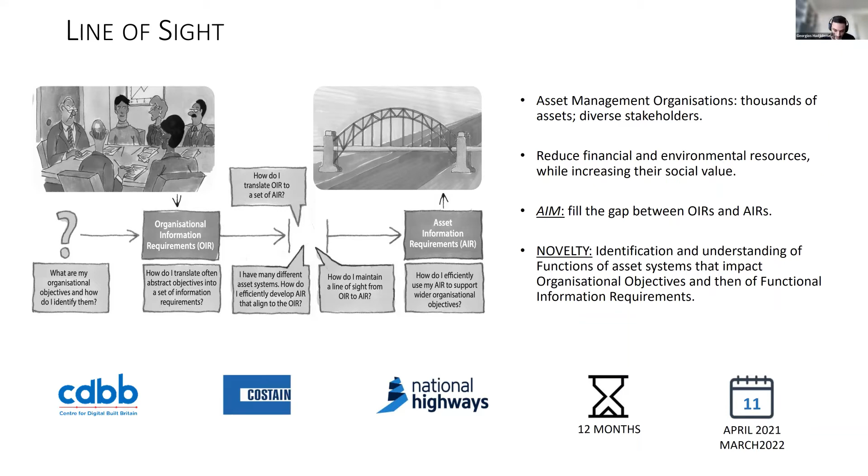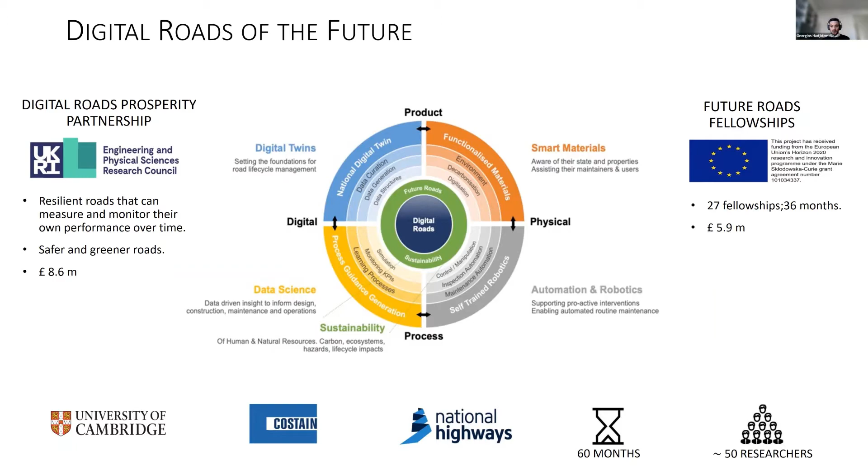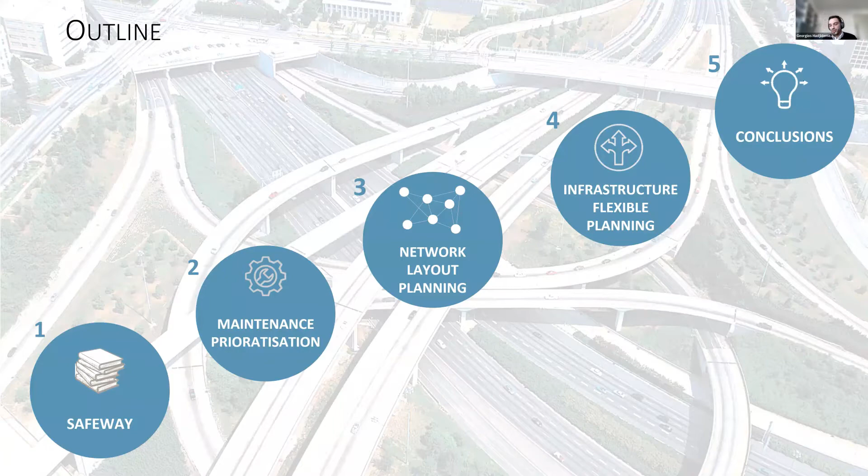This is the outline of today's presentation. I will start by presenting the background of SafeWay, and then 3 methodologies that we developed in CSIC for the SafeWay project. At the end, I will present the highlights and work in progress.

Only in the European Union, goods transport equals more than 3,000 billion ton-kilometers yearly and around 6,000 billion passenger kilometers. The majority of this is on roads and railways. However, European infrastructure networks are currently in insufficient condition due to low investments, and that's why they have high risk of accidents and in some cases low performance and low availability.

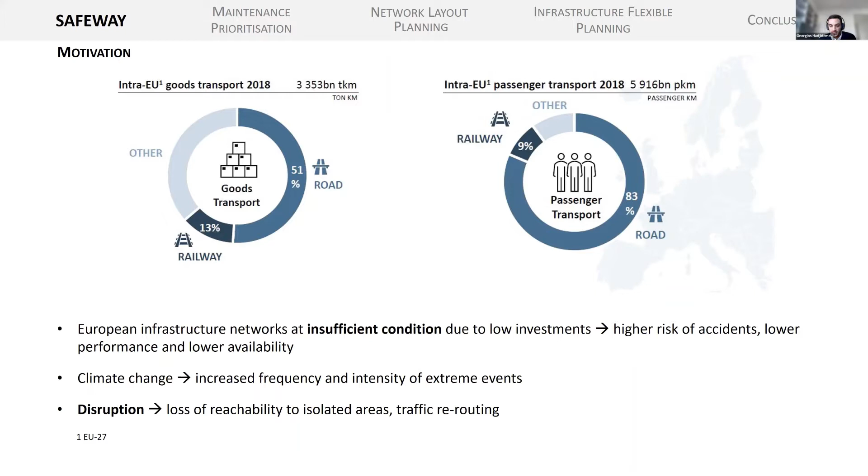In addition to that, climate change will increase the frequency and intensity of extreme events and thus the possibility of a disruption. Disruption on a transport network may cause loss of reachability to areas of interest, traffic rerouting, and reduced productivity.

So the aim of SafeWay was to design and implement strategies and tools to increase resilience of inland transport infrastructure by reducing vulnerability to extreme events. By inland transport infrastructure, of course, we mean roads and railways.

The project was a 42-month project, started in 2018, finishing this month. The budget was 4.5 million. We were 14 partners from 8 countries around Europe. The partners included universities, technology companies, and asset owners.

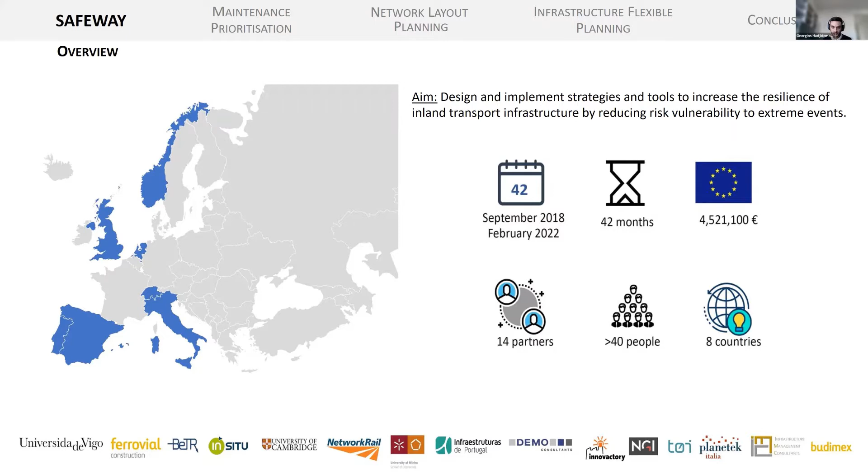Extreme events can be divided into natural disasters, including heat and cold waves, floods, landslides, droughts, wildfires, and windstorms, or man-made events consisting of terrorism, vandalism, and accidents.

The project used 4 criteria for evaluating resilience of infrastructure: robustness, resourcefulness, rapid recovery, and redundancy. It also focused on 3 dimensions of the disaster management cycle, which are preparation, response and recovery, and mitigation. Preparation is all about prediction, monitoring, and developing decision tools.

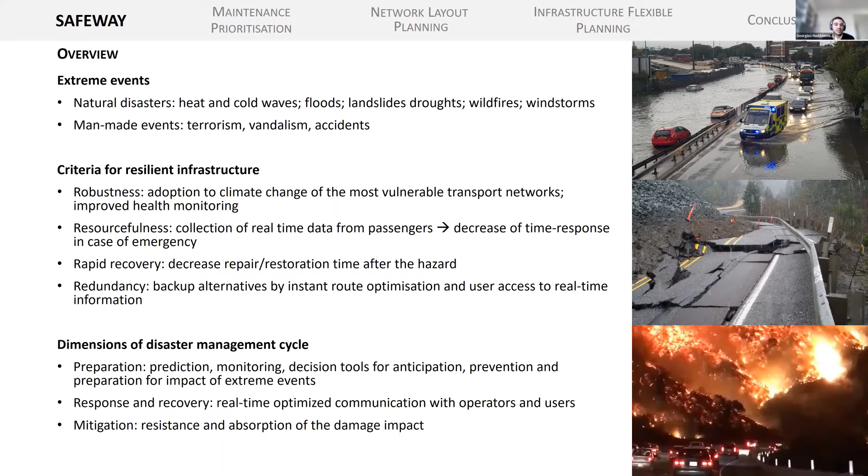In CSIC, our focus was prediction and decision tools. This was our contribution to SafeWay. But SafeWay was also focused on response and recovery by real-time optimized communication with operators and users, and also mitigating the impact of failure by using resistance and absorption of the damage impact.

These are the different work packages of SafeWay. As you can see, they include risk analysis, infrastructure monitoring, crowdsourcing, predictive models, and decision support systems. All of these are the input to the IT platform. And then we have an action plan for improving resilience. The applications that I will show today are related to predictive modeling and to decision support systems.

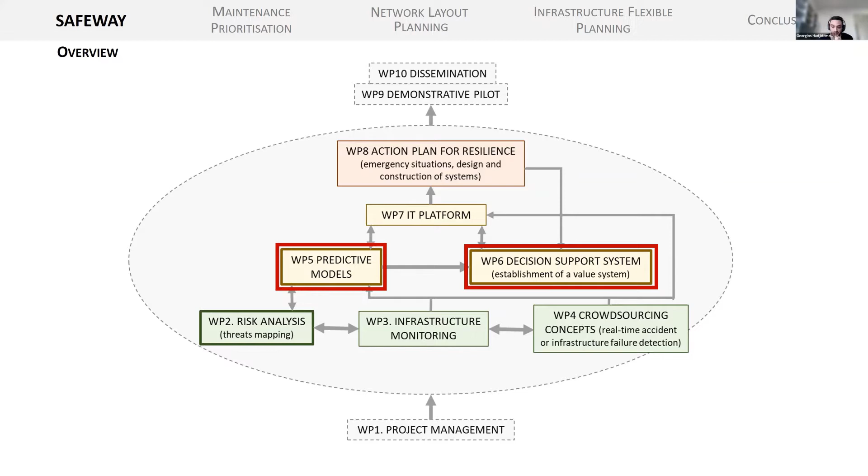The first methodology we developed was maintenance prioritization for bridge elements, considering not only the condition of bridge elements but also their criticality within the network.

The state of practice in transport infrastructure asset management can be divided into different stages, and every transportation authority has their own guidelines and their own steps that they follow.

But these are some steps that most transportation authorities follow for managing their assets. They normally start from condition monitoring, which could be manual, semi-automated, or in some cases fully automated. Then they use deterioration modeling and cost-benefit analysis to decide the optimal maintenance activities to apply, and may evaluate service and resilience of their infrastructure to plan a new network layout.

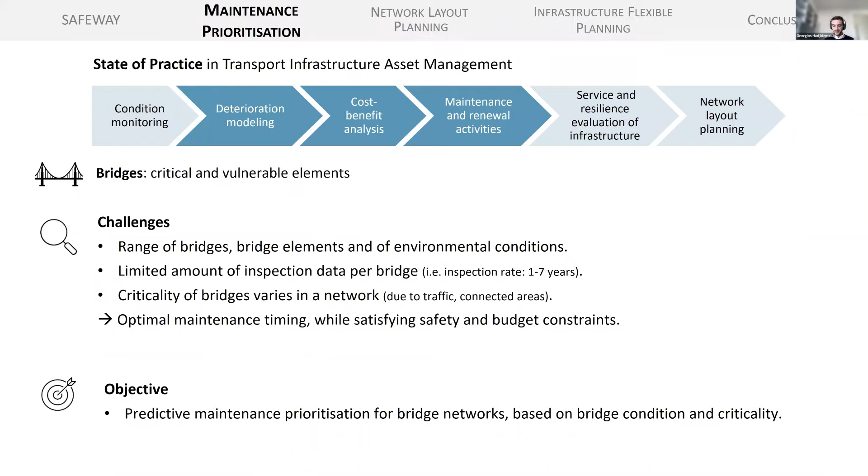Our objective was the development of a predictive maintenance prioritization method for bridge networks based not only on their condition, but also on their criticality. Our method can be divided into 6 main stages.

The first one is the deterioration model. It starts with clustering of data based on the most relevant features, and we do this to address the challenge of having few inspection data for individual bridges.

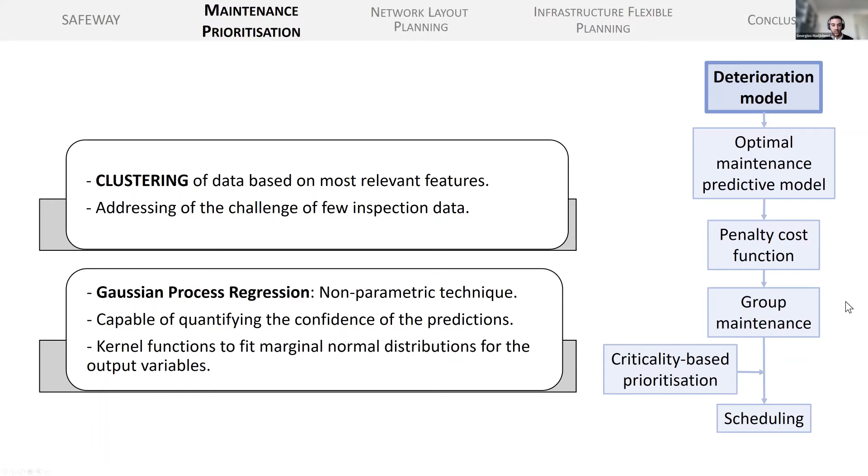Then we apply Gaussian process regression, which is a non-parametric technique. It is capable of quantifying the confidence of our predictions, since it uses kernel functions to fit marginal normal distributions for the output variables.

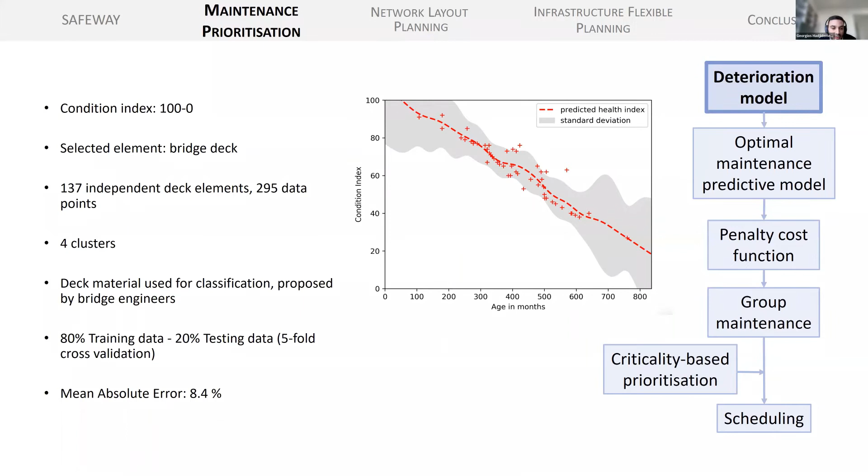We used 80% of the data for training and 20% for testing, then applied 5-fold cross-validation so that we test the entire dataset. Our mean absolute error was around 8.4%.

Moving on to the second stage of the methodology, called the optimal maintenance predictive model. Here we use life cycle cost analysis, and the output is the long-term average cost of bridge elements.

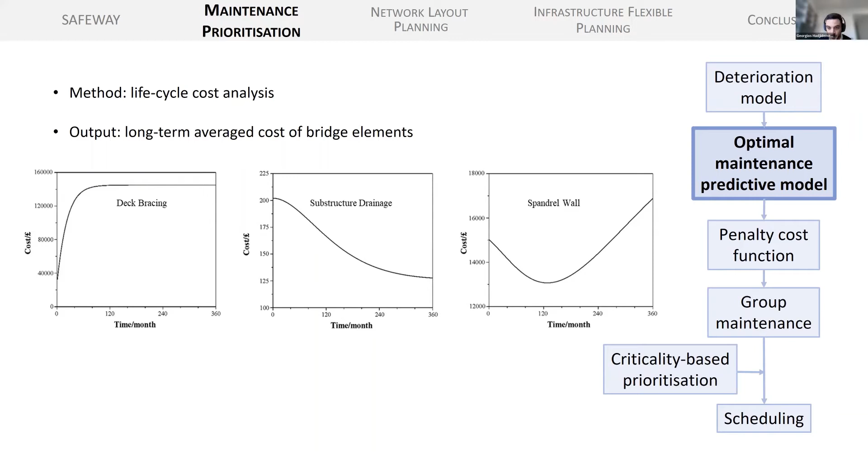The third and fourth stages of this methodology, called penalty cost function and group maintenance, aim to simultaneously maintain different elements belonging to the same bridge so that we reduce the setup cost and traffic interruption.

To do that, we use a penalty cost function, which is able to estimate the impact on safety if maintenance is shifted, in terms of money.

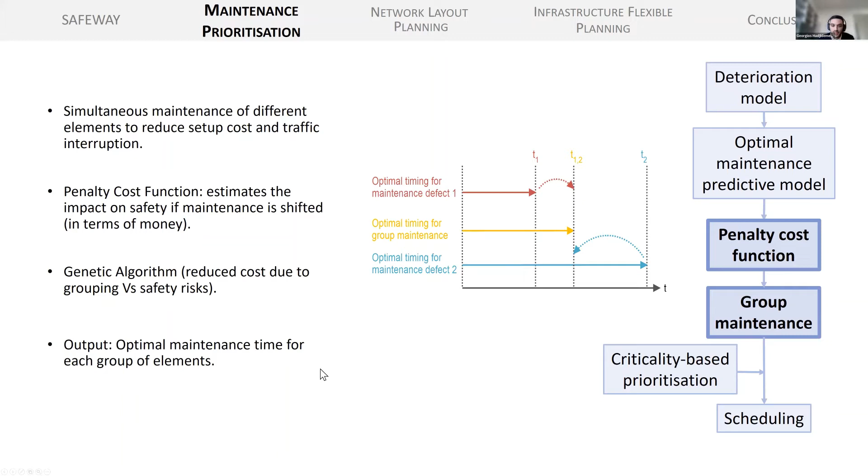Then we use a genetic algorithm to compare the reduced cost due to grouping with the safety risks. If the first is higher than the second, then we go ahead and conduct grouping. The output is the optimal maintenance time for each group of elements.

Next stage is the criticality-based prioritization of our bridges. We want to have a ranking of the bridges based on their criticality. The input here is the location of bridges and municipalities, the distance between them, and the traffic that they serve.

Here we use complex networks, and we have two different metrics to evaluate criticality. First is the traffic that bridges serve, and second is what is the extra distance cost when we remove the bridge from the network.

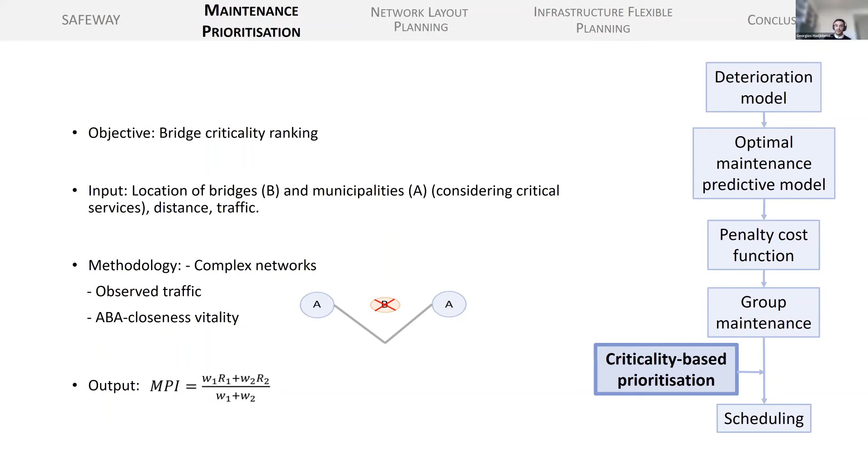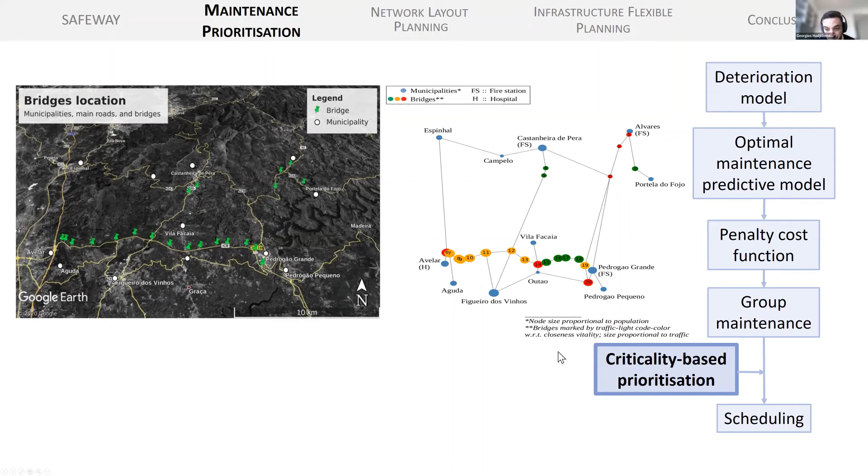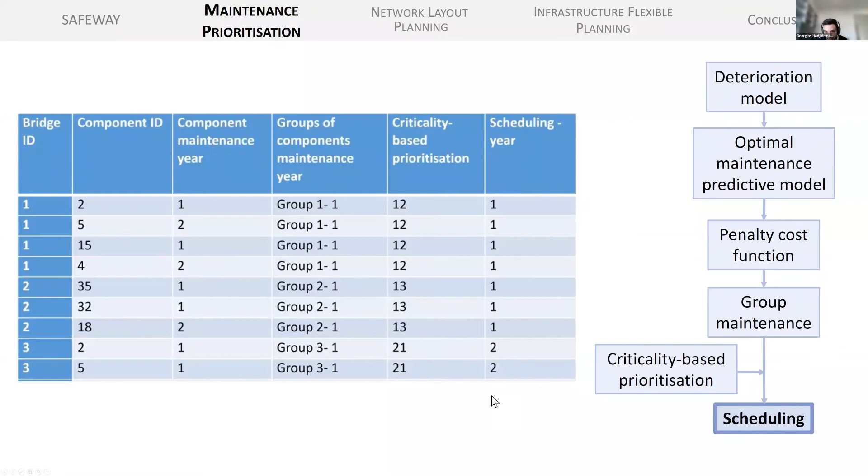Moving to the second methodology that I will present today. It's about... I cannot see the title now. Anyway, it's about the resilience evaluation of existing infrastructure and how we can plan novel infrastructure.

Resilience has different definitions in the literature. One says that resilience is the capability of a network to prepare for, absorb, recover from, and adjust to disturbances. In the literature, we can find a direct connection between resilience and connectivity of a network. When we try to evaluate the connectivity of a network and plan a new network layout, we face some challenges.

One challenge is that we need to follow a network perspective to understand failure propagation and traffic rerouting. Second is that there is significant variation in nodes and links criticality based on the traffic they serve and the impact of their failure. Last is that there is no standardized method for assessing resilience and planning network layout.

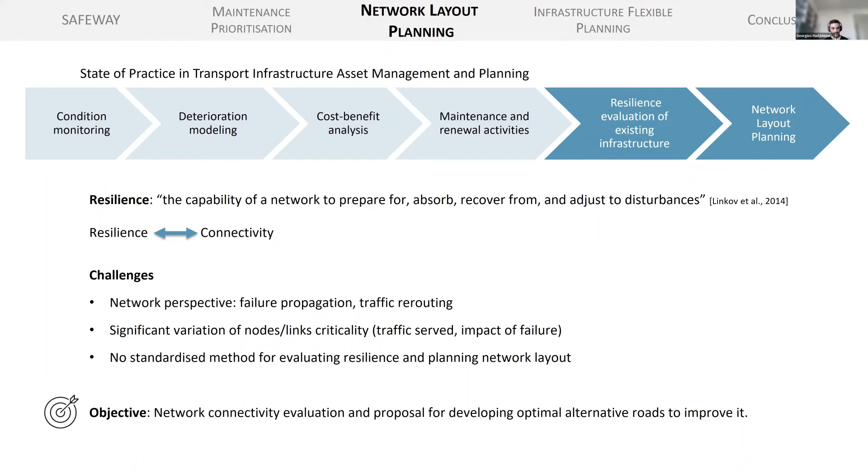Our method can be divided into 3 stages. First is spatial network extension. Here we basically design all the possible new roads that can be developed in our network. We have two types of nodes: nodes A, which represent municipalities, and nodes B, which represent bridges. The solid line links represent the existing road network, and the dotted ones represent dummy roads, which are all the potential new roads.

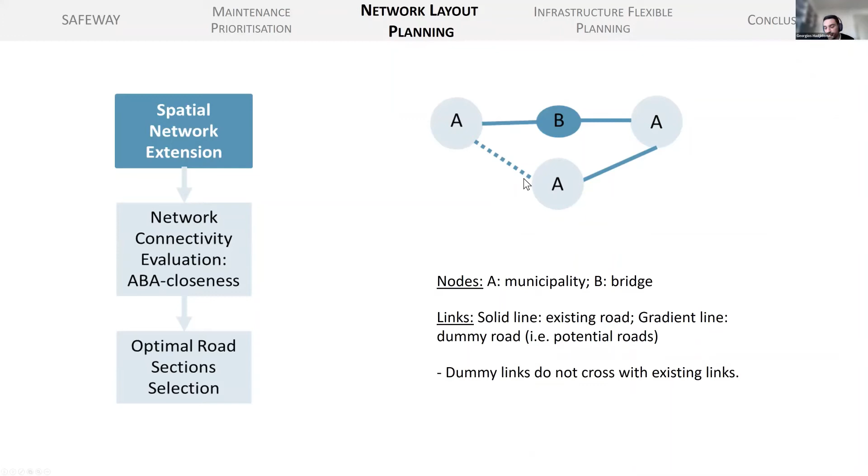Second stage is about evaluating network connectivity using our own developed metric called ABA closeness. It is based on closeness centrality, which approximates the distance between a node and the rest of the nodes of the network, and thus the level of isolation of the examined node. So when this distance is high, we have high closeness centrality and poorly connected nodes with high levels of isolation.

In our case, we use the ABA closeness, which is able to measure the distance for routes starting from a node A, so from a municipality, passing by a bridge and ending at another municipality.

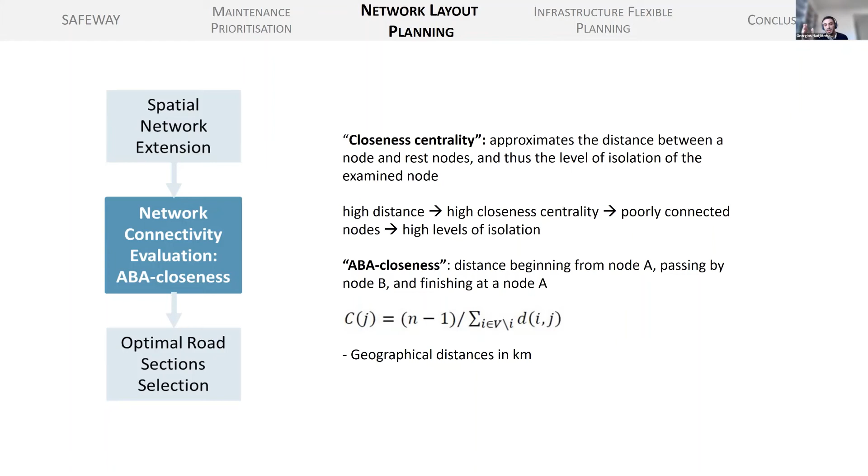The final stage is called optimal road section selection. Here we use a genetic algorithm, and the outcome is a set of K new roads to optimize ABA closeness and improve resilience. The new roads are chosen among the set of all new potential roads, and the user sets the number K of new roads based on budget and physical constraints.

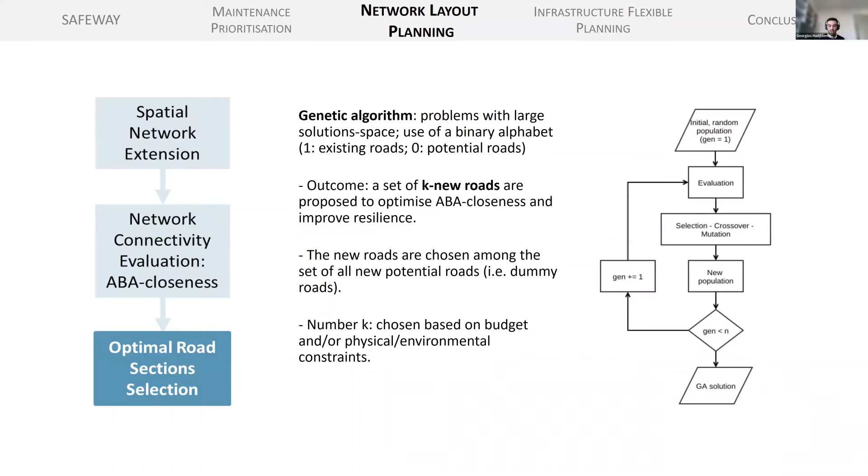This again from the case study in Portugal. We can see the developed complex network. Blue color nodes are the municipalities, yellow color nodes are the bridges. The black color links are the existing roads, and the gray color links are all the potential new roads that we can develop. For this example, we use Python.

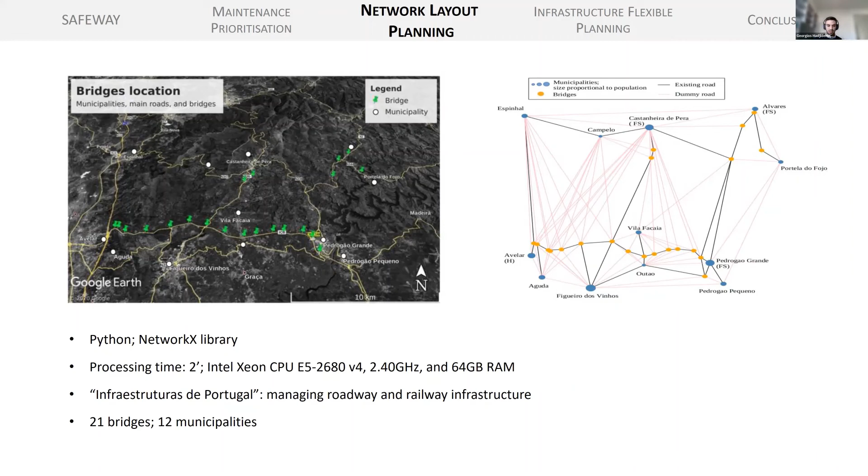Processing time was 2 minutes. Data is coming from Infraestruturas de Portugal, which is the organization managing roadway and railway infrastructure in Portugal. In this example, we had 21 bridges and 12 municipalities.

And these are the results for developing 3 new roads and 5 new roads. For 3 new roads, we can see that ABA closeness is reduced from 0.57 to 0.35. So our connectivity is improved. And in the second example, we can see that it's reduced from 0.57 to 0.31 by adding 5 new roads.

In this example, we can see that we don't have to add a very high number of new links to improve connectivity of a network. With 3 new sections, we have a significant improvement of connectivity.

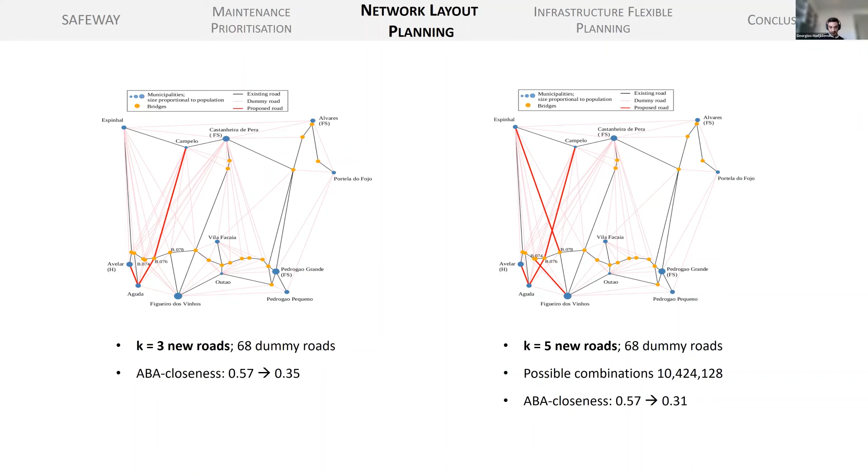Moving quickly to the third methodology, which is about infrastructure flexible planning. So the challenge in planning infrastructure is that there are high levels of uncertainty in technology, population, climate, and economy.

Here we try to use a methodology called dynamic adaptive policy pathways and apply it to the road and the railway network. This methodology is normally used for designing policies related to flood risk management, because these policies need to be flexible and dynamic due to changing physical and social parameters.

The methodology is divided into 10 stages that I will not get into detail because it will take a lot of time. So I will directly go to our case study, which was the connection between London and Manchester.

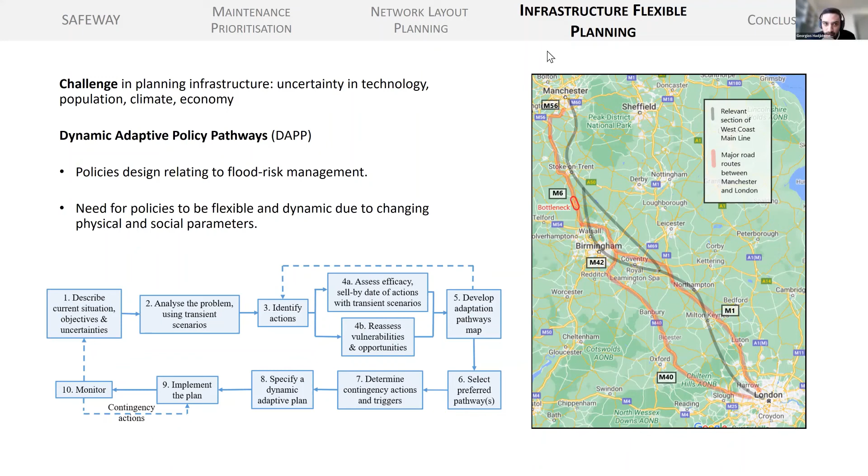We can see with red color the road network and with gray color the railway network.

So in this figure, in the y-axis, we have the number of passenger journeys during morning peak time. And in the x-axis, we have the date starting from 1995, going to 2040. Blue color are the road journeys, red color are the rail journeys, and gray color are the total journeys.

Here we can see the capacity, the existing capacity, and the capacity that we will have in the future if 6 potential actions are going to be applied. These actions are related to new projects that will increase the capacity of the network.

And then we can also see the demand, the existing demand, and then the projected demand for using the roads and railways connecting London to Manchester. So this figure is helpful to find points in time where capacity cannot serve the demand.

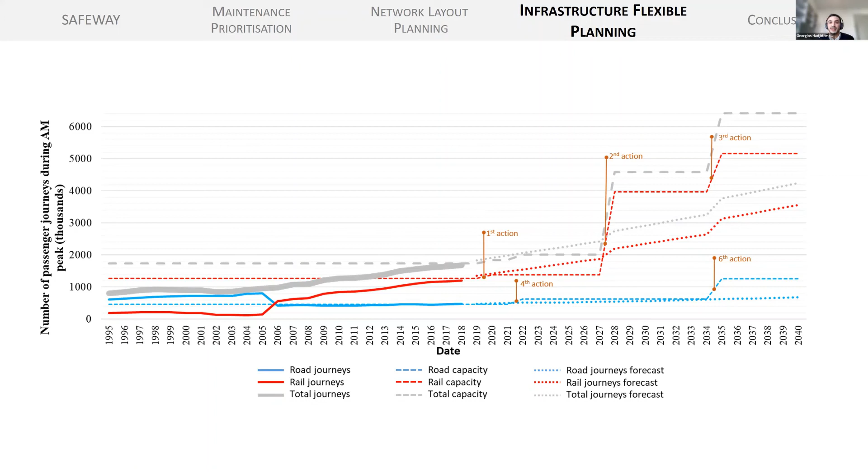Here we can see in the y-axis the 6 identified development actions. First one is the use of 11-car trains. Now, most of the trains are 9-car. Then is the development of HS2 phase 1, HS2 phase 2, operating M1 and M6 as smart motorways, having infrastructure for electric vehicles and having infrastructure for autonomous vehicles.

This kind of representation and this technique help us to see when an action will start and end, what is in construction, what is in operation, when do we have demand over capacity, when are the major decision points.

And for this case study, our selected and proposed path is shown in red color line. And it shows what action we propose that need to be followed. But the good thing about that is the flexibility. At any point, you can decide that you want to follow a different direction if something is going to change in the future in terms of population or climate or economy or even technology.

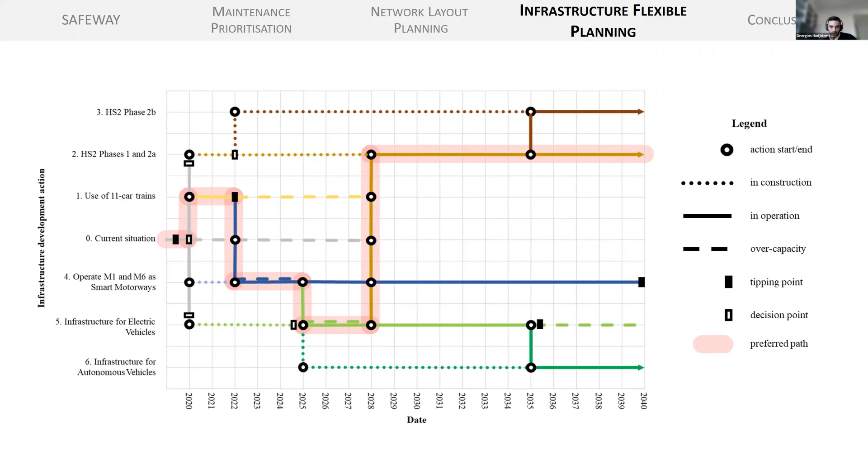So the highlights of today's presentation regarding the maintenance prioritization method: we noticed that we have improved the results after clustering for our deterioration model. It is applicable to any bridge element, and especially when our data set is small. Group maintenance of elements belonging to the same structure can reduce the setup cost and the traffic interruption at around 10%.

Regarding our second methodology, adding a limited number of optimal new road sections can significantly improve connectivity. And as we said, connectivity is directly related with resilience of the network. And so if we have improved connectivity, we have improved resilience.

And finally, dynamic adaptive policy pathways is a method that can be applied to multi-project transport planning, facilitating ongoing adaptability in response to variations in forecasted demand and capacity.

At the moment, we are working on several other small projects that are related to what I have presented. We are trying to develop deterioration models considering climate change. We want to add the element of vulnerability to our predictive maintenance model. Vulnerability: we are going to include what is the possibility of failure and what is going to be the impact of failure.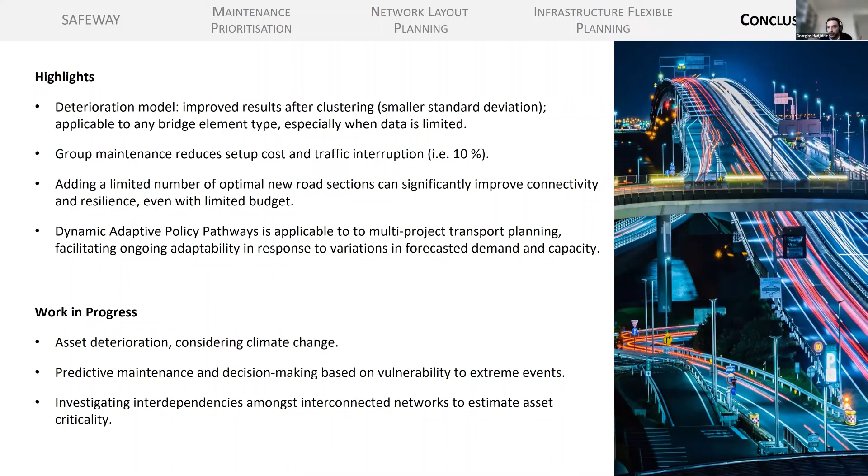And finally, we investigate interdependencies amongst interconnected networks to estimate asset criticality, because transport networks are connected to each other, but at the same point, they are connected with power networks or with telecommunication networks, for example.